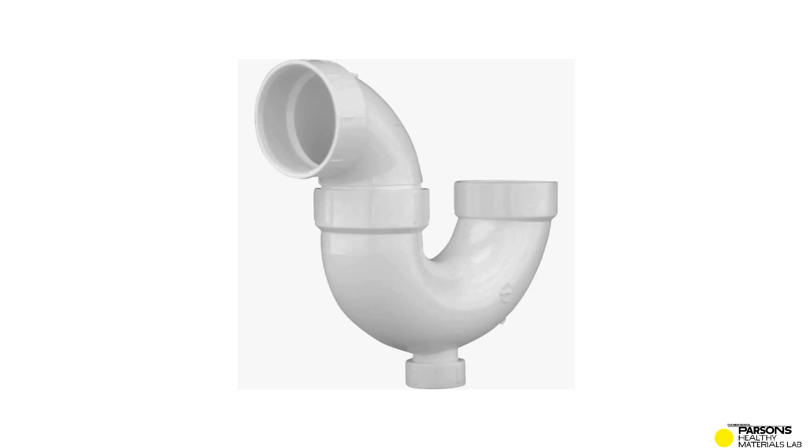As inquiry about matter around us evolved, we gained understanding of atomic structures of this matter, and people began to speculate on other molecular structures that are not found in nature, and began inventing new materials without understanding how they would degrade or impact environments and all living things. And now, synthetic materials are our ubiquitous building blocks of our homes and of our lives.

We're on a mission to accelerate the building of healthy, affordable homes, to eliminate toxic, climate-polluting chemicals and materials, and replace them with healthier, carbon-sequestering materials.

Because products typically used in construction contain materials that are linked to human disease. Their ingredients impact people in construction, production, as well as the people who live with those materials in their homes for long periods of time.

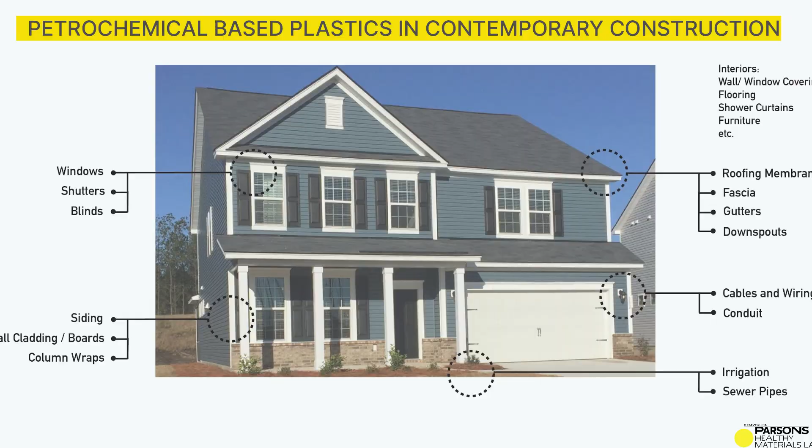And as you might know, contemporary affordable homes are primarily constructed of products that are made from petrochemicals. These fossil fuel-based products use a vast array of untested, often toxic chemicals that consume and emit carbon.

And the places where these products are made are polluting the water, air, earth that all living things rely upon to survive. So this is a systemic problem, and we look at it like that.

It's known that the materials in buildings, cities, objects, and furniture are releasing toxic particles that are absorbed into all of our bodies.

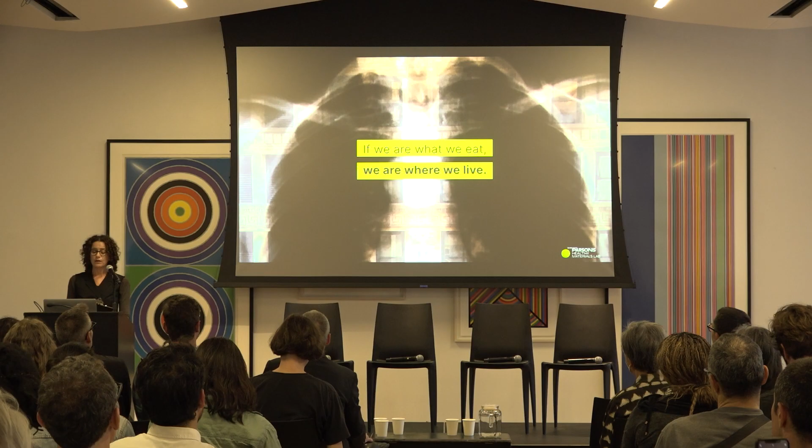We assume that the materials and products that we use in our daily life, not only in our buildings but in our consumer products too, have been tested for safety. Yet, most chemicals commonly used in the United States are not regulated for their impact on human health or the environment.

The Exposome Project provides evidence that 90% of human diseases are from the exposures over our lifetimes, and only 10% are as a result of our genetics. You get that? Only 10% are a result of the genetics.

This research is explained even in more depth by our partner at New York City's Mount Sinai Institute for Exposome Research, which reveals that thousands of industrial chemicals are now found in the blood of all of us. And these are the same chemicals that trigger many of the diseases that harm us today, from cancers to diabetes.

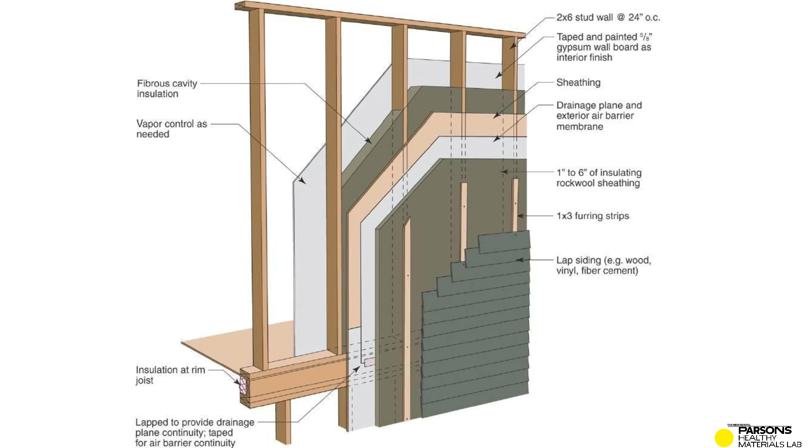Yet, a typical residential wall system in the US shows that many layers of building products often contain those same toxic chemicals. So you see how we're eager for healthier building systems to become the norm.

We're at an inflection point. We're living through kind of an exciting time for all kinds of reasons, as we all know. But we cannot continue to build in the same way that Western civilization has been developing.

At Healthy Materials Lab, we're asking, what is the pathway forward? How can we design and build healthy buildings today? We address the toxics and climate issue by charting new pathways to design and build healthy buildings.

We look at materials and ingredients through the lens of material health, asking how does it impact human health, carbon emissions, social equity? Does a product produce waste? Or is it biodegradable or regenerative? Does it pollute our water, soil, and ecosystems? We ask these questions of materials at every stage of their life cycle.

And we see that building homes is central to our ability to make this change. Through building healthy, affordable housing, we can build a demand for agriculturally based products, while also addressing toxics, carbon, equity, and loss of biodiversity issues.

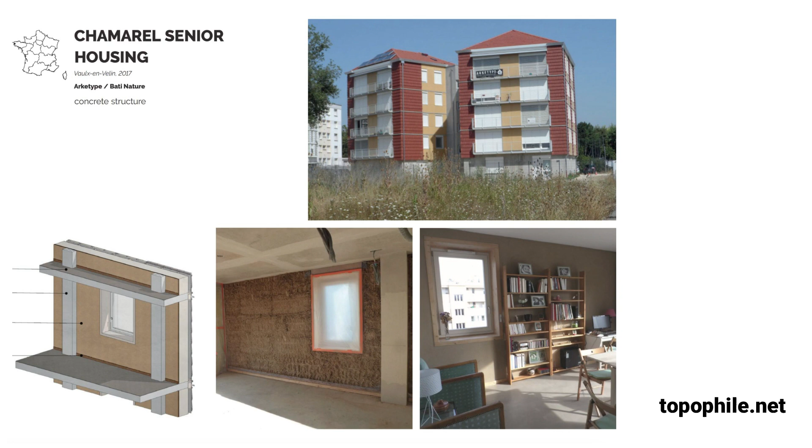It's encouraging to think that we can eliminate the use of toxic greenhouse gas producing building materials and instead build our cities with renewable plants. If you caught the program we hosted last December with Martin Pacot, founder of Topophile, you will have seen these examples of social housing and civic buildings in France, which are made of straw and other nature-based materials. This one is senior housing.

So tonight we're excited to connect the work of trailblazers working on exactly these issues, who have similar ideas to express this, and they're doing it. Each of their work is at the leading edge of creating a fully functional system from harvesting and farming grain to producing scalable building products to architecture with straw. Their knowledge is essential to make necessary change for the construction and architecture industry. So please help me welcome Ace, Jacob, Alex, and Paul.

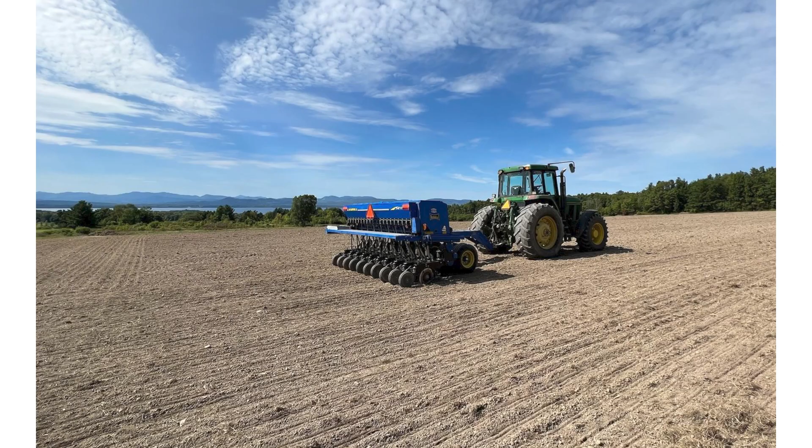It takes a lot more passes to prep the land in organic farming because we're not spraying, so we're not killing any of the plants. We're not using herbicide, we're not using pesticides, and so we'll have to work the land a lot more to get it ready because we're essentially trying to kill all the weed seeds by turning them back into the soil over and over.

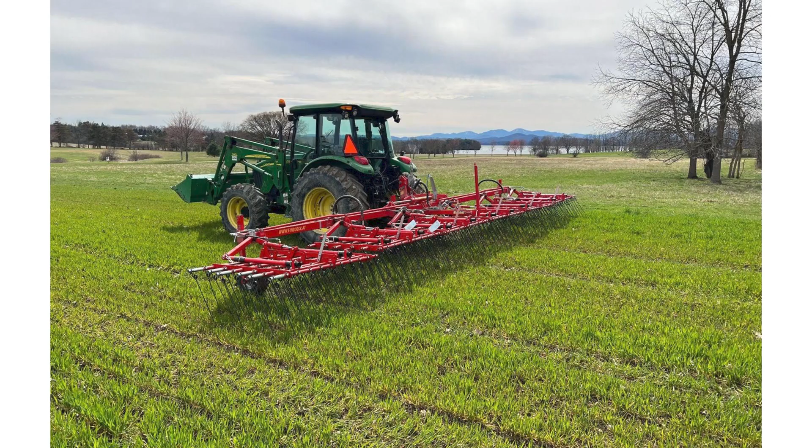This is a grain drill. This is how we plant the wheat. After we plant the wheat, it sprouts, and it usually grows to about this height that you can see here. It's like short grass.

Like I said, we don't use any herbicides, and so this is called a tine weeder, and we'll go back with that, and that's how we do weed control. We just drag that over the plant. It doesn't hurt the wheat plant, but it will kill the weeds underneath.

As the wheat matures, it grows luscious and green and tall. A lot of people don't think of a wheat field as being luscious and green, but it is, and it's really beautiful. Then in the beginning of July, usually, it'll start to turn gold, and the heads will lean over. Once the heads lean over, it's an indication to us that it's getting pretty close to being ready to harvest. So in organic farming, we wait till the plant dies on its own, and it dries down.

It has to be dry enough that the combine can harvest those wheat berries out of the heads without crushing them. So we have to wait until weather is on our side, until there's an opening in sunshine, but the plant is dry enough.

Whereas in conventional farming, they'll go in and spray the whole field, killing the plant in a matter of days, and they can harvest it. They can really time their harvest. I've handled some material, some bales that have come off of fields that have been sprayed, and they feel a lot different. There's a lot of residue on them.

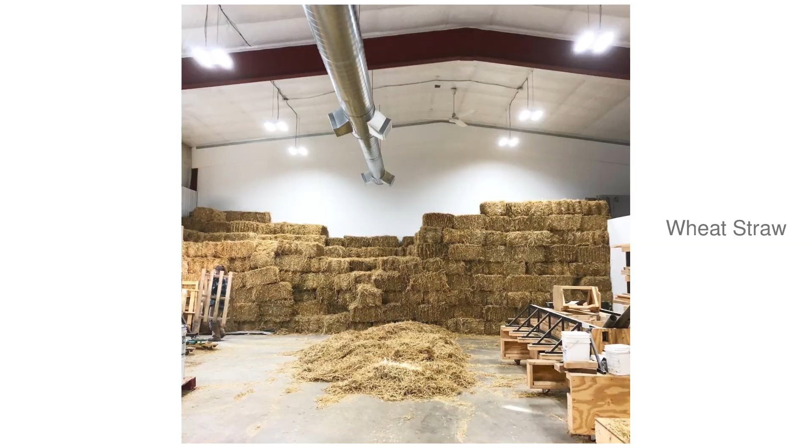We received those straw bales from Aurora Farm, from the Nitty Gritty Grain Company. David drives up in his truck, he backs up. This is our shop in Essex Junction, Vermont. And we toss the bales into the back of our shop and begin to build with them.

We thought we'd take a moment to introduce the other materials we use in our panels, because it's not just straw. We also use lumber for framework, and in our pre-designed modular buildings we use local Vermont lumber as well. The species are eastern hemlock, white pine, and spruce trees. The sawmills we work with are local sawmills sustainably managing woodlots, often for generations in the area.

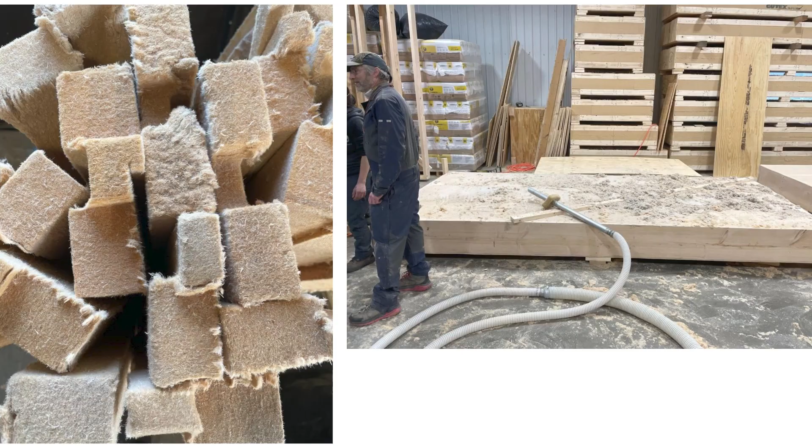Here's just a photo of what that wood fiber board material looks like. These are just pieces that we ripped, but I like it because you can really see the texture of the wood fiber. It's amazing to work with this material. On the right, that's an example of us spraying it, loose fill, into a cavity, utilizing our cellulose blower that we'd use to blow dense packed cellulose. So we utilize this material in a bunch of different ways to complement the straw for areas where we need other kinds of insulation.

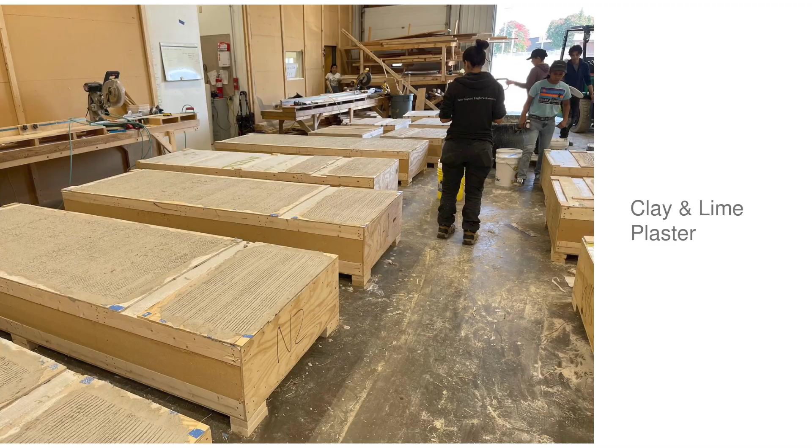This is a shot of our shop applying clay and lime plaster. In our high-performance natural building journey, we've really understood how we can use minerals in complement with plant-based materials. Clay is the friend of straw - that's maybe just the fun thing to say. Clay is amazing, I could talk about it for so long, but I don't have time.

But one of its wonderful properties is that it is very thirsty for water - it is hydrophilic. So when it sits next to a plant-based material like straw, what it will do in the long run is just keep that straw super dry over the long term. Also, because it is extremely vapor permeable, it allows that vapor, any water that gets into the assembly for whatever reason, to evaporate into the air. It does not hold it, it does not lock it in.

So one of the things that was a big challenge with buildings experiencing any forms of water failure in our climate was because they were plastered with cement and cement renders. So we've learned a lot about the use of these different pieces.

This shows us doing an awesome thing, which is getting to dump the plaster on from standing height rather than pick it up and put it onto a wall, which is what we always did when we were building these, not as prefabricated panels. So we're very happy about that.

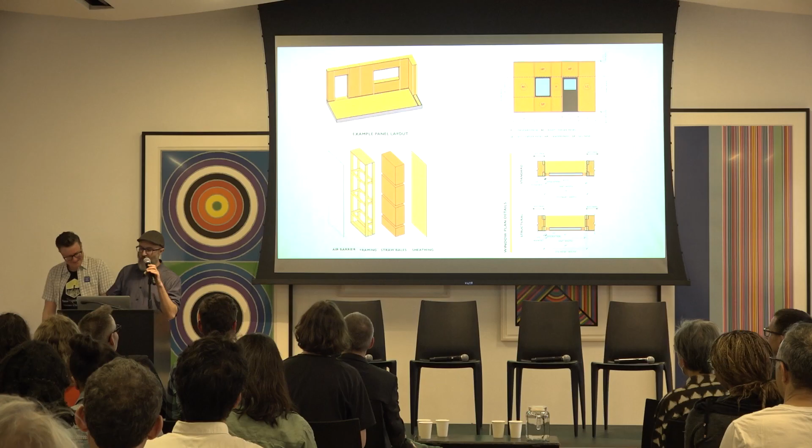New Frameworks is a worker-owned cooperative with several aspects to our company. In addition to manufacturing panels and doing site work in the field, we work on existing buildings, and we also have a full-service architectural team in-house. We do a lot of our own design work, shop drawings, and coordinate with architectural clients so the design process is as smooth and integrated as possible.

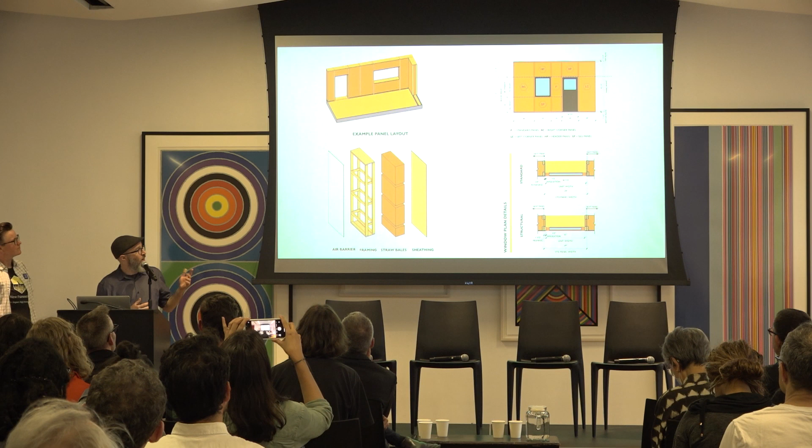A couple photos here to break things down, looking at the actual details of the panels. In concept, we're basically looking at double stud boxes stuffed with straw, with a plane of sheathing on the exterior and an air barrier on the interior. We're looking at examples of clay and lime plaster that we use for our favored air barrier, but you'll also see examples using vapor variable air, more typical conventional air barrier membranes as well.

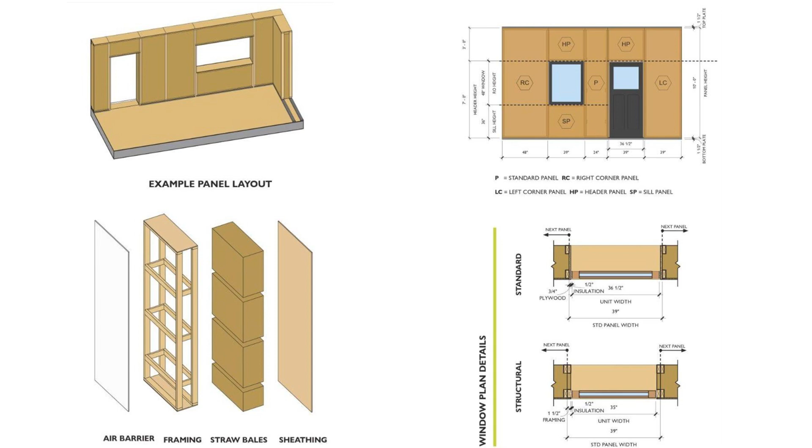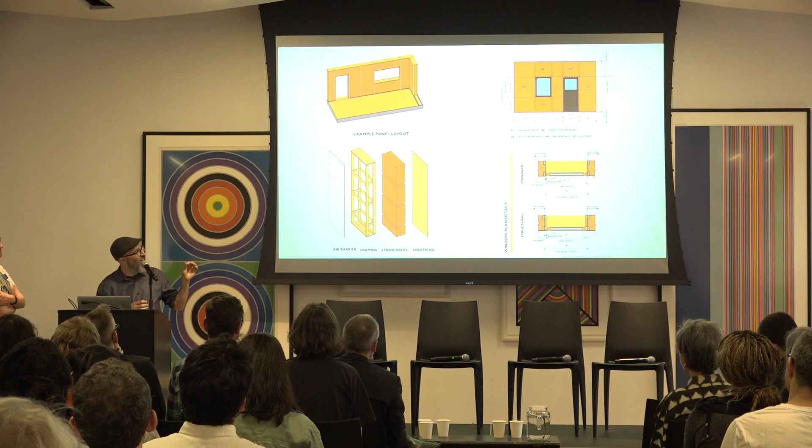The layout is kind of what you'd expect if you've worked in modular before, thinking of how to use panels to make a form. All window and door rough openings are built of the negative space around the panel headers, sill pieces, and the full height pieces on the sides. We're using the panels to formulate both the positive and negative spaces required to substantiate the entire shell of a building. You can get a sense on the right of some of the detailing, mapping out each panel individually.

When we bring this to the design process, we get very specific. We try to optimize designs to standardize or minimize the number of different panels required. If you've got 17 different size windows scattered in mosaics around the walls, that's significantly more expensive than bringing that form into greater simplicity. Part of bringing straw into buildings in a way that's streamlined and cost effective is incorporating the panelization process into the design workflow.

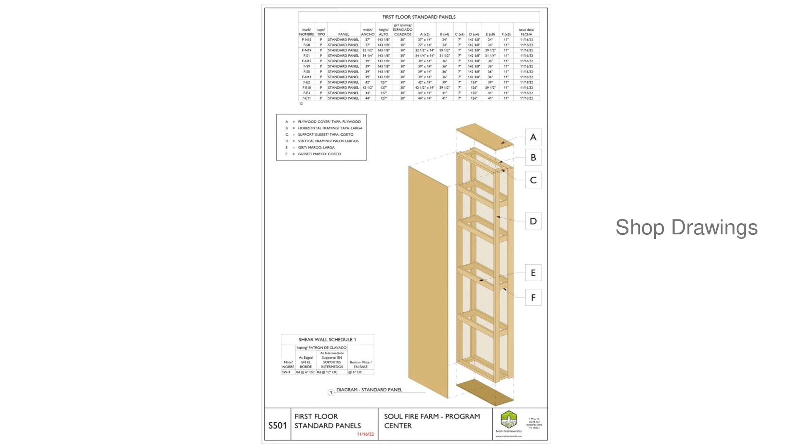As a design build cooperative, we bring that intention into the design process. It gets as detailed as every single panel getting a name, a code if you will, and is individually cared for in its transition from the shop all the way onto site, with the goal of minimizing the number of steps so you don't have to pick up or put anything down more than necessary.

This is a little shot of our shop, and this is the very simple tool we started with. One of our goals is to make this process as simple and replicable as possible, so our goal is not to have complicated, expensive CNC equipment required. This is something that can be replicated and done quickly, because we are in a climate emergency and we need people to replicate carbon storing, low carbon technology as soon as possible. Part of this is just a super simple design.

Our table that we build our panels on is essentially a plywood box on casters, so we can roll it around our shop, and our shop can be very flexible and movable. We have this framework created by a local metal worker in the city of Barre in Vermont. We drew up these plans for him and he bent it up for us. The framework keeps the panel square, and we build inside of it so it always creates the form for the panel, keeping everything square and tight. As we place the studs into the frame, we pack it with straw and go layer by layer until we get through the panel.

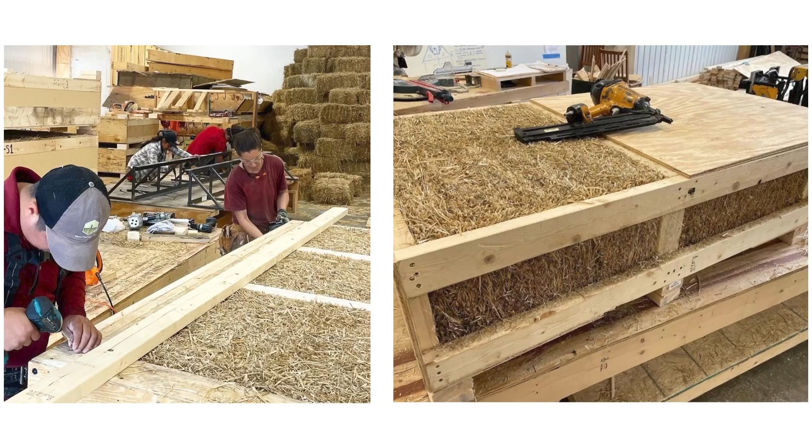We can build panels up to 12 feet in height at this time, and then we can make them any size shorter than that is necessary.

Some more photos from our shop. There's Marina and Jose in the foreground working on putting together and squaring and finishing up a panel that's already been built. We have a team in the background, Antonio and Avelia, working on building the panel in the frame. That's typically how we work.

We have stations, so we have the building happening and then the finishing and squaring in those processes and steps. And this gives you a sense of shipping and packing. I know we looked at this photo before, and in this context it's helpful to show how we stack the panels and get them ready for shipment.

We are very intentional about the way that we pack and ship our panels. We don't use plastic and a bunch of intense packaging to send them, but we make sure they're safe, and we can talk about how we keep them dry during shipment. We test our panels for moisture level when they leave our shop, and then when they're received on site, they take those measurements again, so we make sure everything is in a good zone in terms of moisture content for building.

We pack them in such a way that, if you remember the plan view drawing that Jacob showed with all of the panels around the building, we make our stacks so that when they're offloaded, they will make sense to the person who's installing it. They'll start with a corner and be able to undo the stacks all the way around.

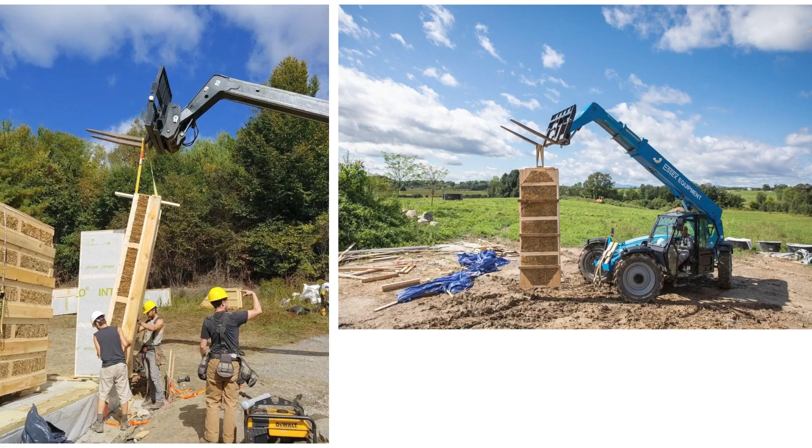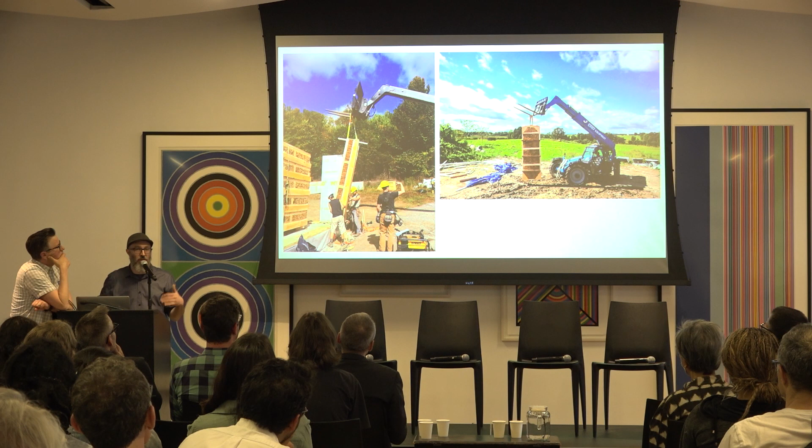So examples of what that looks like on site. We won't spend too much time so we can fit in a few more slides, but there they are going in. Again, they're designed intentionally to be relatively maneuverable on site and be able to integrate into smaller projects without the overhead and logistics of larger lifting equipment.

So that said, they can also serve for larger projects. I know the aspect looks a little funky, it's a fisheye view here. It's not actually a curved wall. But just to give some... you can't do that. You can do that if you're so inclined.

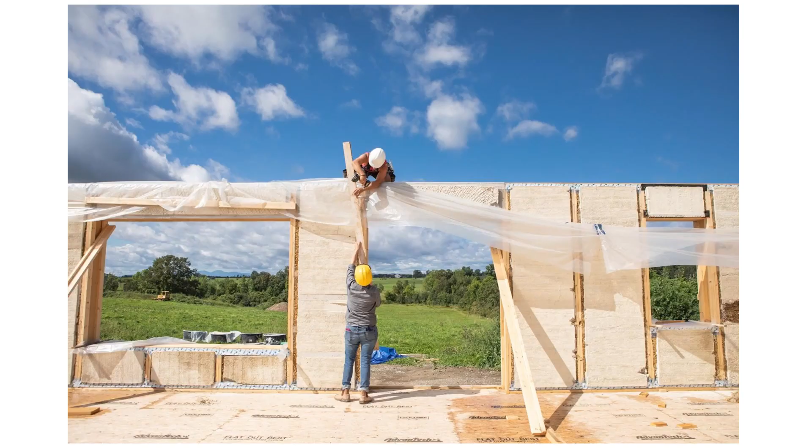Yeah, so this was a project that we did for some farmers in our area. What's fun about this is seeing the way that when we do plaster the interior, which we do both that and other approaches as well, you can see the seams that are in between each panel. It's very much like drywall - you have to mud and tape the seams when you put it together, and then we put a finish coat over the top of that. So that's just a fun thing to check out.

That's awesome when you have a shape that you're trying to fill that is also square. But when you don't, when you have something angled or something that's differently sized, it can get tricky to use straw. So we use a flexible form insulation.

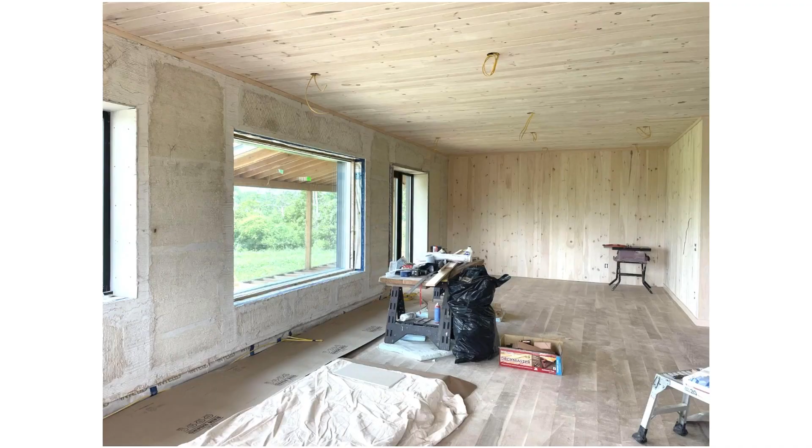This is showing dense packed cellulose, but like I said, we've now started to use wood fiber fill as our main fiber insulation. And then what I was saying about that earlier, one of taping the seams, you can see that's what that looks like. So this is a project with the seams taped and ready to receive that top coat of lime finished plaster.

Just to spin through a couple more details, a little more of a close-up of what that rough opening looks like. You'll notice these horizontal girts that are in the interior of the panel there. This panel is not being plastered.

It's going to receive an airtight vapor variable membrane and then an interior gypsum wallboard cladding. So those horizontal girts are used to keep the straw in compression during manufacturing, and then also become points of attachment for those additional materials, or if you have an interior service cavity. So we do have these.

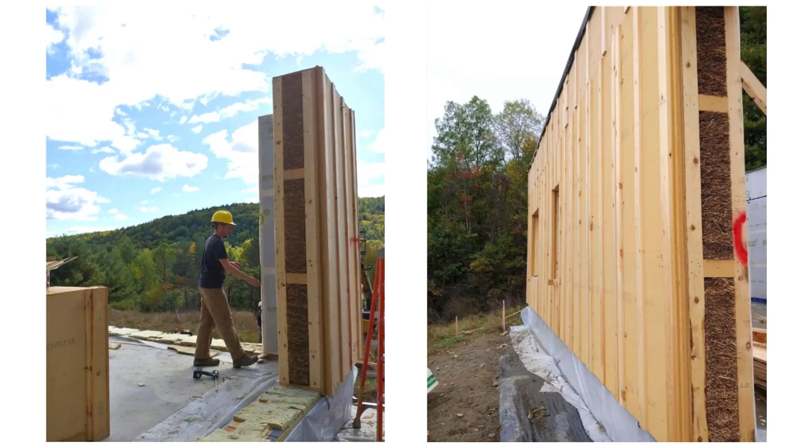A lot of people wonder how you fasten things onto the straw, and there are challenges to that. So there are some anchoring points built in during the process of the panel construction. This is from actually our very, very first panel project.

So some of the details are a little outdated, but kind of the talking points here, we've improved the form of the track at the bottom of the wall, but these panels are very exact in their construction, but most slabs and foundation systems you walk onto are not.

So we have a sort of a bottom plate, basically a double bottom plate, the first of which is installed directly on site to get to a level square form off of which the panels can sit without telescoping errors as you move your way up the height of the building.

And in this case, they're going for a higher level of insulation and decided to wrap the walls with full insulation wrap of that wood fiber board. So you can see it again in application here as an exterior wrap for an ultra high performance wall assembly.

Just looking at a couple more of these details around the plaster system, the air barrier system. So we have been innovating ways of getting airtight connections from plastered skins to wood products for going on 10, 15 years now. We've tried lots and lots of different things. You can do it in a very low tech and kind of inexpensive mechanism to get a long-term air seal between those dissimilar materials.

That said, it's awesome that they actually make tape for the purpose. So there are air sealing tapes that are fleece backed. They're designed to literally mud right into a plaster assembly.

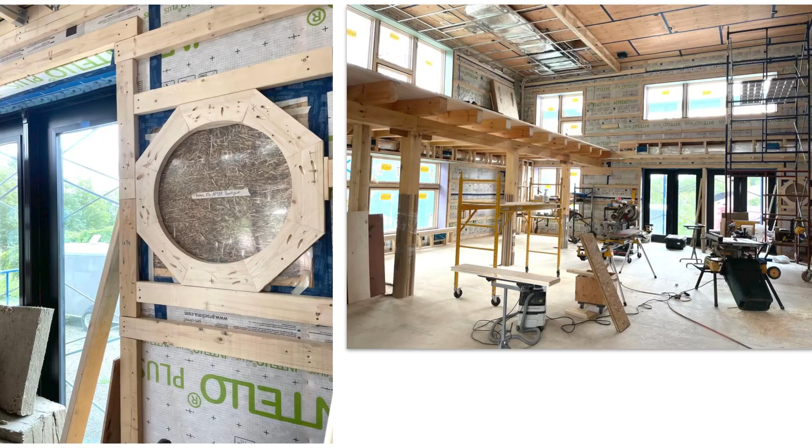That said, this would be an example of the same, but without a plaster assembly. So we've got a typical vapor variable airtight membrane on the interior, and here, this is that same commercial facility, so we've built out a service cavity to be able to facilitate running wiring, kind of separate the trades in the field so that electricians aren't needing to get into the walls. When you're running condensate lines from heat pumps, you don't have to worry about in-wall connections.

Can I just quickly say something about that last one? And then if folks want to see an example of what that looks like, I noticed that's how the Croft panel was sent. So that little square panel there that's sitting on the floor with the black, if you look to the interior, the part that's facing us right now is the exterior, but on the inside, they sent it with a service cavity to the interior. So you can get a feel for what that looks like.

And just some more elegant detailing on the plaster. We're a big fan of the system, and again, there's a thickness to plaster, so there's a little more design intention required to make sure everything lands the way you'd like it to. It need not be super expensive. When we apply plaster, it's relatively at cost parity with finished drywall systems, as long as those details are considered in advance. The Eurotrim approach of using the extension jamb to give a nice landing point to the plaster is an example of how to dial that in quickly and efficiently.

So this is an example of one of the buildings we've created through our Casitas program. We designed some small modular buildings using the straw panels as a base. To ask the question of how do we start with the field and move through to the form, we realized that though we could continue to be custom builders, it didn't make as much sense because we want to build on the straw panel basis and that modular element, and create designs with our own in-house team that really fit with that logic of form.

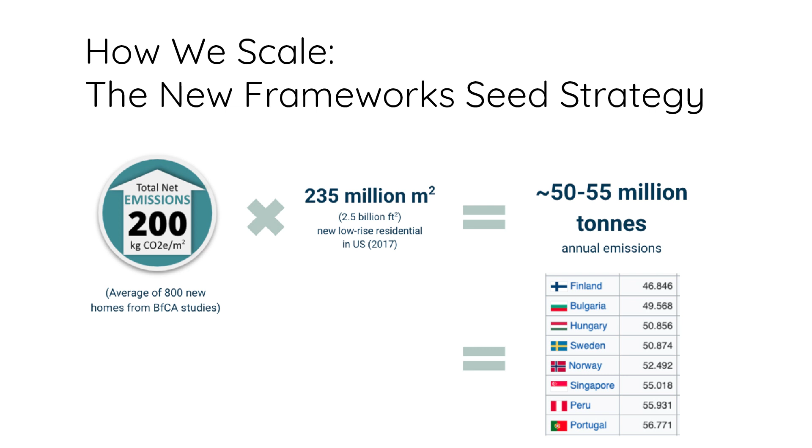All right, so just to wrap up on a few points on context here. We really strongly believe in the power of residential construction to make a really large impact. We use these panels in non-residential applications as well, but our roots are in residential construction. When you look at the average material carbon intensity of a North American residence, and multiply that out by the amount of square footage of low-rise residential construction built in 2017, the emissions from that material basis alone are larger than the entire emissions of Finland, Bulgaria, Hungary, Sweden, Norway. So this is the scale we get to intervene in when we're working down to a small scale.

We tend to think of industrialized materials and industrialized scale buildings as being the place to lean into, and we believe there's a horizontal replicability of improvement that can really move the needle at this scale when it's dispersed in such a wide format across our continent. So our approach to scale is not to become as large a company as possible. We find it's a lot more effective for us to port information than technology, so we're now working with cohorts of other companies interested in developing their own panel manufacturing processes, trying to build a network of panel manufacturers in various regions — one, so you won't have to ship to Idaho, and two, so that in every state we've got multiple panel producers working with materials from that state and providing housing solutions within that region. That's our approach for trying to address scale at this level while still holding onto the quality and culture of being a smaller organization.

And just to give a few other pieces, building a little bit of data bona fides behind that, one of my other hats is developing the BEAM tool, which is a material carbon emission tool.

If you want to talk about embodied carbon nerddom, come find me at the drink later.

Really excited to be able to put data to this, to both validate and optimize the carbon storage benefits of working with straw. We work with straw for a number of reasons, one of which is that it's the most effective way of storing atmospheric carbon that has been photosynthesized into materials into a building. There's no better material we've found to do that. So in the Terra, the building that Ace just showed, almost 6 metric tons of carbon are stored in those bale walls in that 900 square foot building, which yields a building storing 3 tons of carbon in all of its primary materials.

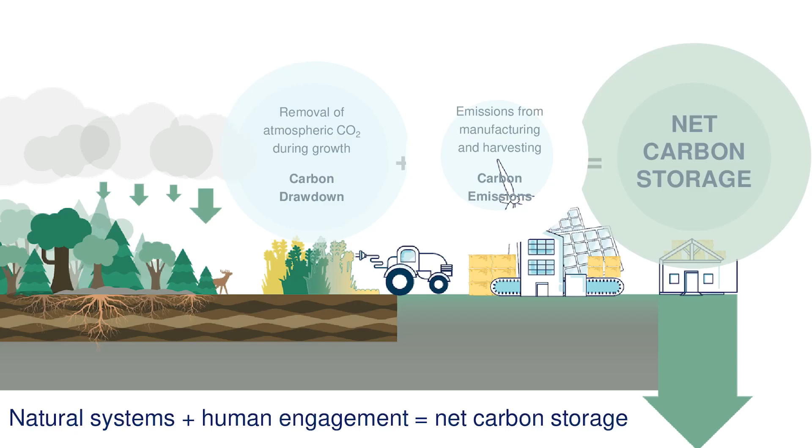So for us, whereas our current approach to architecture is to design a building, look for the materials, and extract them to provide the building, and green building tries to extract less harmfully, our approach working with straw is to look at the resource flows coming out of sustainably managed forests and agricultural systems. How can we take those resource flows, turn them into products, and design architecture around that product basis, which puts us into a much more humble and collaborative relationship with the ecosystems we rely on to sustain the built environment. So by shifting that model around, field to form, not what can we extract for the form we want, but how can we manifest beauty and form out of the resources available to us. That's the logic behind why we're continuing to work with this material.

And that logic extends far beyond just a technocratic solution. We could just be happy working with straw, but how we're working, and the actual process of the work, matters too. There's an internal and external part to that. For us, being a cooperative has a really important social value, being able to provide not just jobs and careers, but actual pathways to ownership for all of our team members, many of whom would be disenfranchised from company ownership in most other sectors of our economy. The value of our company's existence has been built off weathering the transition to being a manufacturer, weathering the disruption of COVID, weathering the recession. We relied on a cooperative structure to help pull us through those difficult times. It's literally a form of resilience for us in being able to continue this innovative work.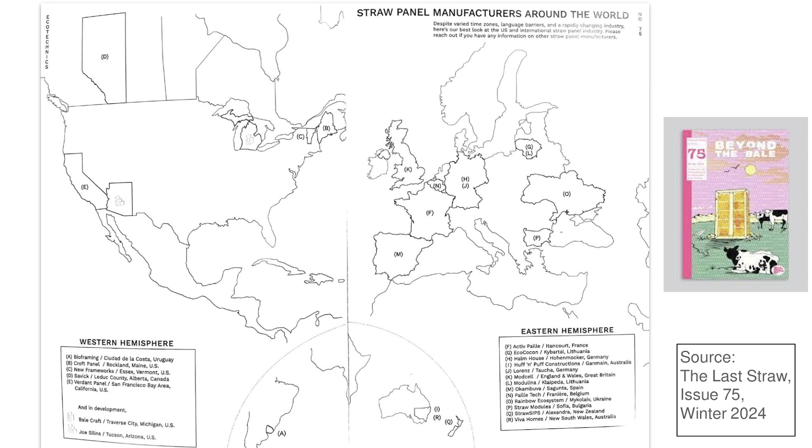So then the last straw, we've got a couple of issues over there folks are welcome to flip through. This is amazing, a periodical that serves the straw bale building community, which recently put out a whole issue on panelization and straw. The fact that we can see straw bale panel producers all over the globe, and see where they are, is incredible. This is a really amazing new moment we're in, a rising tide of people asking how to build with biogenic and plant-based materials.

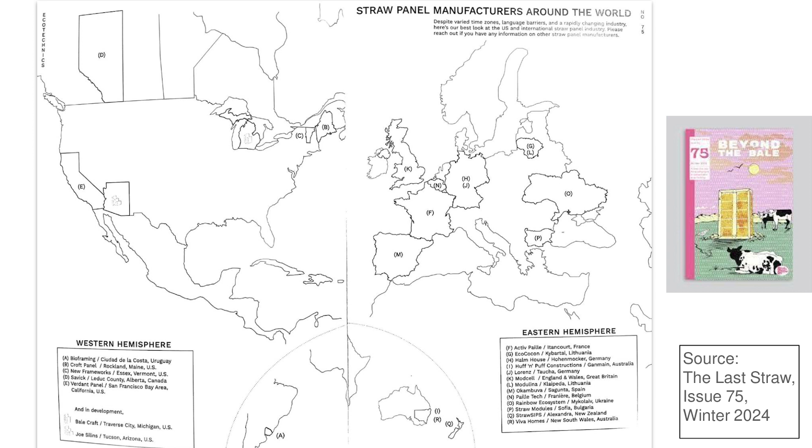And I believe we have Peter from EcoCocon here, Peter Jensen. Yay, hi Peter. EcoCocon brought a panel as well, and Croft, who's based in Maine, and we're based in Vermont. And then we have Greg Bossy here from Rare Forms, based in Massachusetts, part of our SEED program, one of our cohort participants this year. Just seeing this grow, I want to look at this and be here with all of you in 5 years, and this is just a colorful dot of beauty. That's what I want to see.

Back in the fall, on November 15th, we partnered with Mass Design and Halff Climate Design to gather folks from across the Northeast to answer the question: how can we scale plant-based and bio-based materials rapidly to meet the challenges we all know we're facing? We felt it was most effective to do that cross-sectorally, bringing in folks from outside the AEC industry—architecture, engineering, construction—and also policy folks, government folks, and academia, because we need creative ideas and need to answer these questions in a broader way.

So if anyone's interested in learning about this collective, we are bringing everyone in that we can and working with a bunch of working groups to solve questions and really move this forward. I want to give a shout out to Jonsara Ruth and the Healthy Materials Lab for being part of that initiative—they were in the original summit. So yeah, this is truly collaborative.

All right, last slide here. So where we're moving with this is positioning this work within a larger movement beyond just a technology stack. We started this work as little individuals, riding on the shoulders of other small individuals trying to figure this out over the course of the last 20, 30, 40 years in modern context. Most of them didn't make it and couldn't make a business model from it, as it's quite difficult.

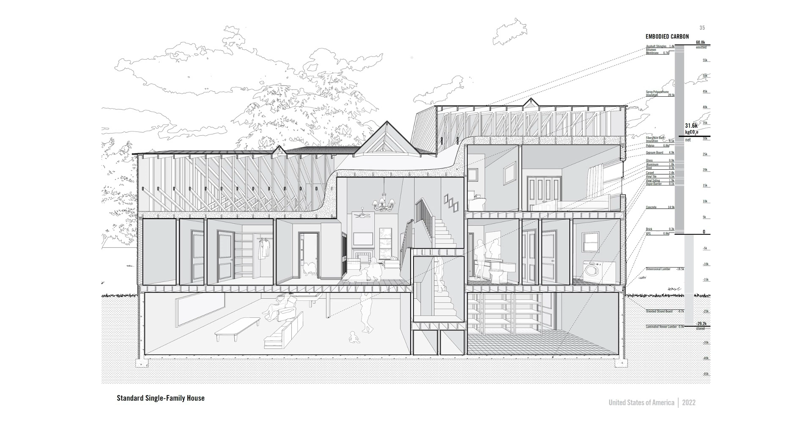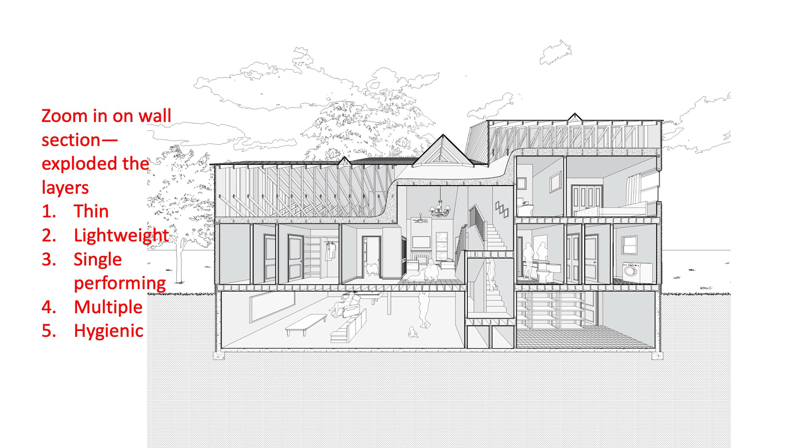Great to be here. So I'm going to dive right in and pick up on what was already said. Not only are we dealing with the problem of toxicity, carbon emissions, and reliance on petrochemicals, but we've also gotten into a position where we're building a lot more than we need, particularly for houses. Houses have scaled up dramatically from 1950 to 2020, and a lot of this is a product of the fact that architects became obsessed with the exterior finish and the interior—not so concerned about what's inside. I'll blame ourselves in our past formation for being in that camp.

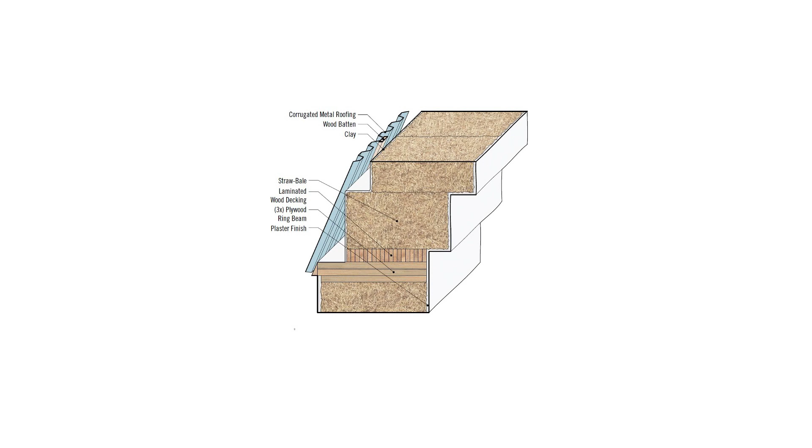But in a sense, we don't look as closely as we need to at all of these multiple layers that exist, and the fact that we've inherited this system involving incredible quantities of lightweight, thin, single-performing, sterile layers that largely produce a strict binary between interior and exterior. There are other ways to go about it, and I think this is architecturally super interesting to wrap your head around—what are the ways in which we might look at single materials or monomaterials, thickness, ways to engage a totally different relationship to the built assembly.

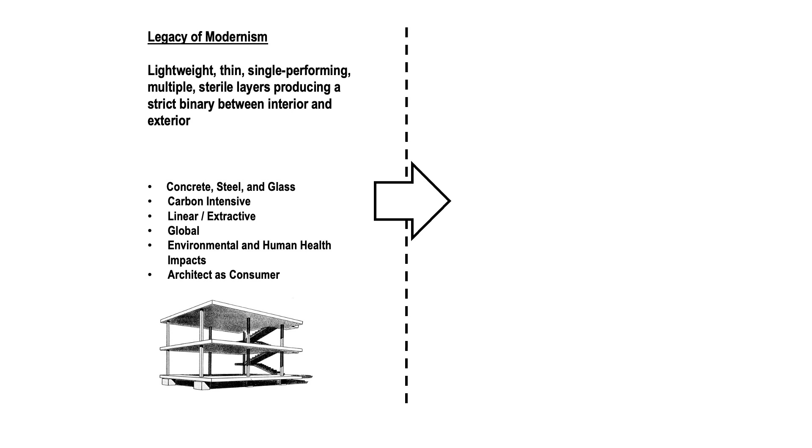So these are samples of some of the projects that we looked at in our book. Largely they support an argument that says we've inherited this legacy of modernism based on materials that position architecture essentially as a kind of consumer, and we really need to move to a model where heavy, thick, regenerative materials position architects and designers to be more engaged in the material cycles. This is really a paradigmatic shift—it's not just simply a shift of substitution.

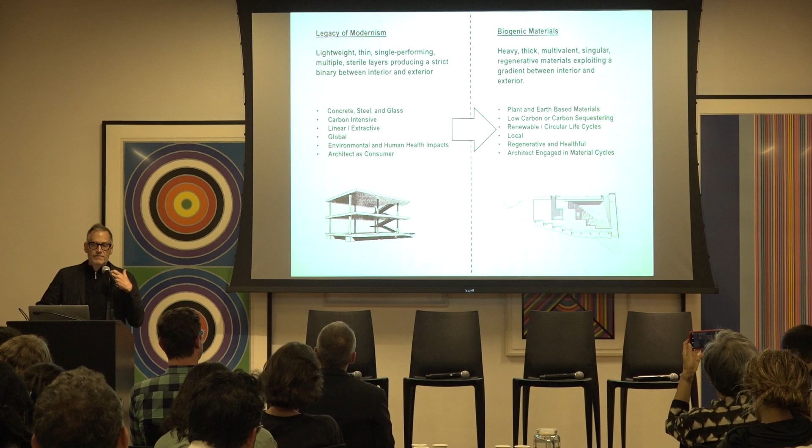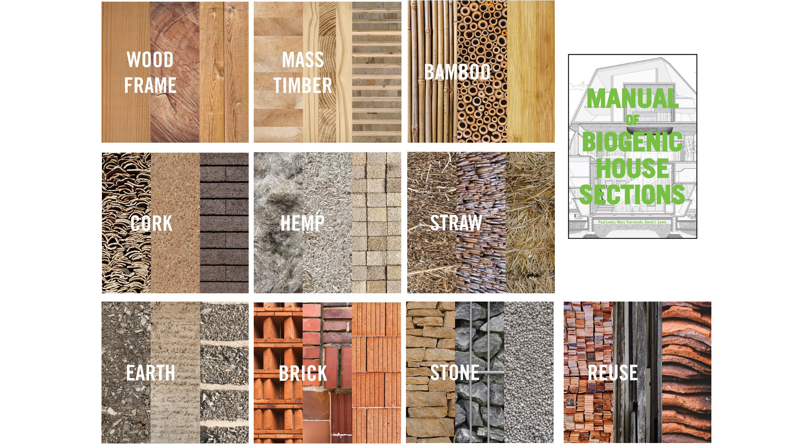So that was the basis of the 55 houses that we looked at in this book. It was organized according to different chapters of dominant materials. And it's interesting to note that of the plant-based or biogenic materials, really only hemp and straw grow quickly. So CLT and mass timber is not going to save us. It's certainly better than steel and concrete, but we have to look at other models.

Straw is extraordinarily important in this context. It doesn't displace agricultural crops, as has been mentioned. It's essentially a kind of residue of a food system that's already in place. It is everywhere, it's ubiquitous.

There's an anecdote, and I'm not even sure if it's true, but it's a great anecdote, which is that the amount of carbon sequestered in straw worldwide is equal to the amount of carbon emissions of concrete. I don't know if it's true, but it's great. And even if it's partially true, it's at a scale that's really significant, and that's what we need to capitalize on.

The issue is, how do we store this in the buildings? And more importantly, are there ways that this would transform how we even think about the design? What are the ways in which buildings might need to be able to capitalize on this? What's the architectural invention that could come from this?

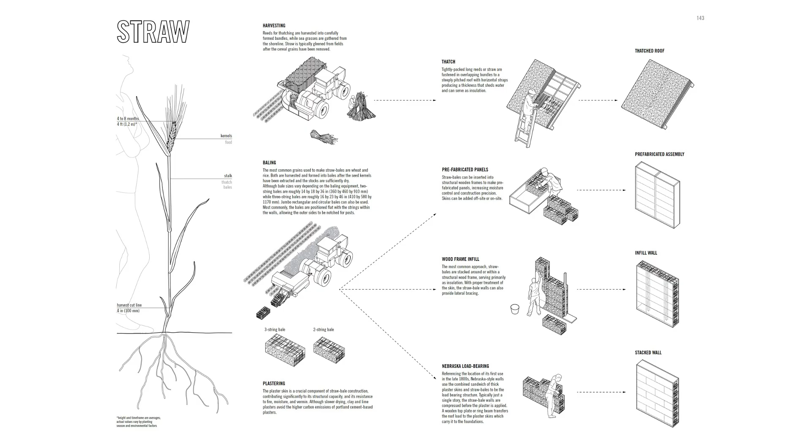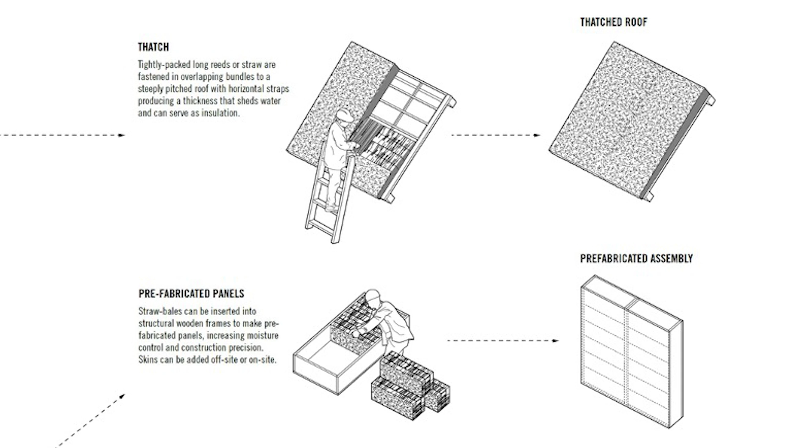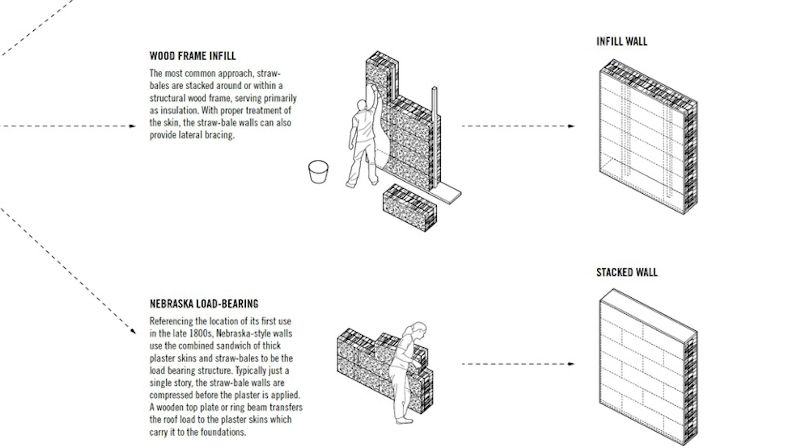So we've looked at, just moving quickly, when you translate straw into building form, there are certain known models. The prefabricated panel we've heard about. There's also the ability to place it in an existing wood frame, again not letting it be the structure. But there's also, in fact, one of the origins of the use of straw is as a load-bearing insulation, the so-called Nebraska load-bearing frame.

This dates back to the late 1800s, when balers were first being made available, and there was a lack of access to other building materials. And there's some buildings that still exist, 100 years old.

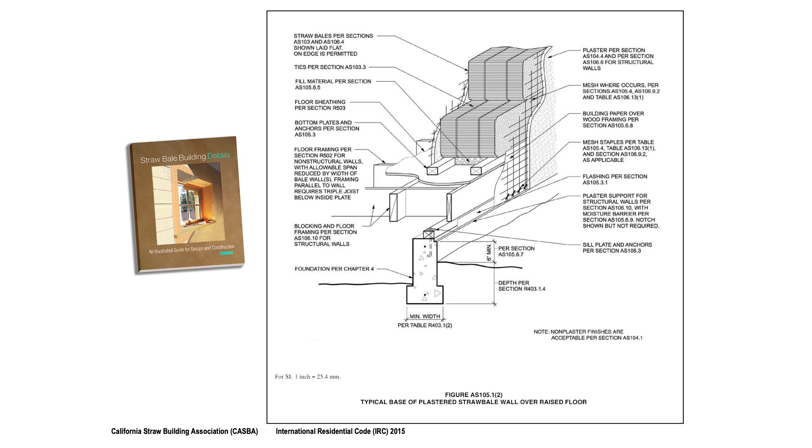And it should be said that not only does straw have a kind of long lifespan, a long history, but it's also recently been codified in IRC and code. California Straw Building Association and others need to be heartily thanked. I highly recommend this book. But one of the interesting things that comes out of this is to try to think, what are the impacts on how we might go about working with this material?

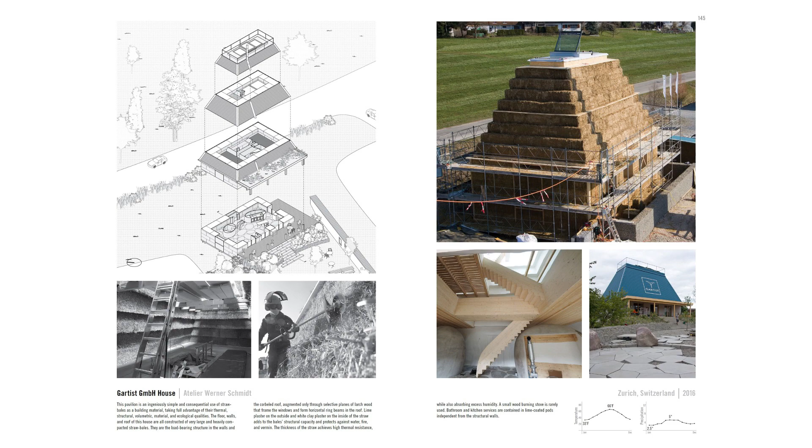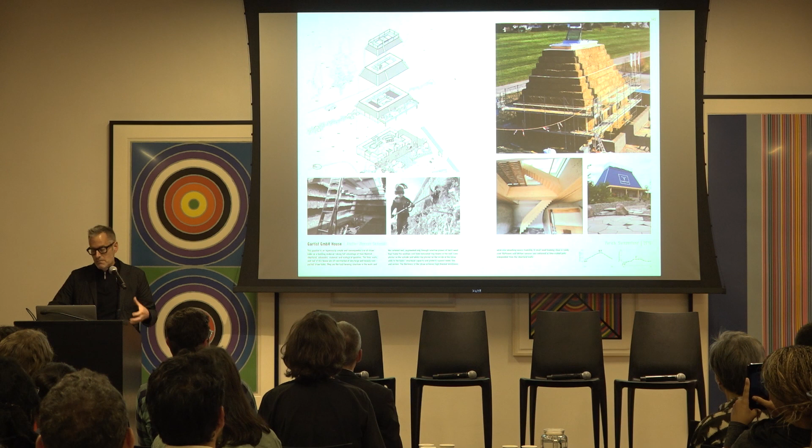And so we become very interested in the load-bearing insulative capacity of, say, jumbo straw. This is a project by Atelier Schmidt, uses 30-inch by 50-inch by 100-inch, 650-pound jumbo bales that are then tied together with ring beams of CLT, but it's essentially load-bearing, and produces this super thick insulation structural blanket that contains about 84,000 kilograms of CO2. It's a kind of fascinating change to what we expect architecturally.

This led to, and I should say, the research on the manual led to us wanting to design 5 biogenic houses, which we did. After 4 years of looking at other people's work, you kind of want to design your own, so we did. 2 of the ones I'll present today are based on straw. And we worked with an amazing team of people, but I have to mention Kyle Reich and Celia Chesabel, who were instrumental in both of these two books.

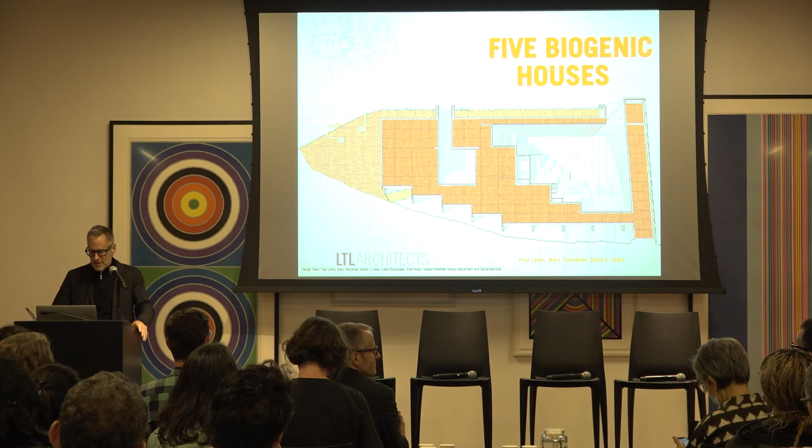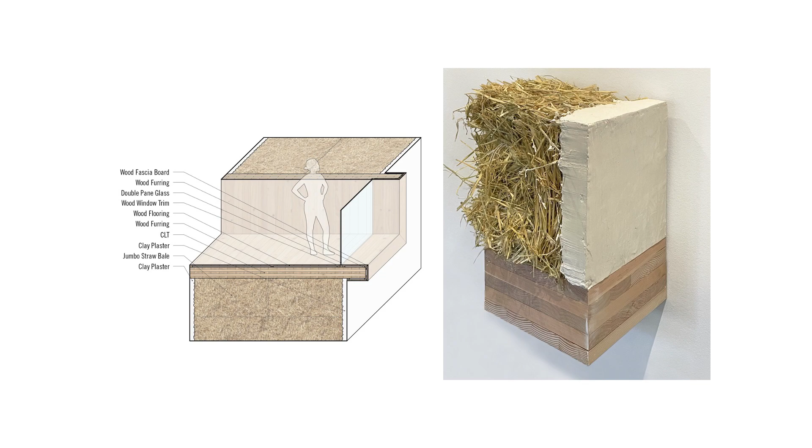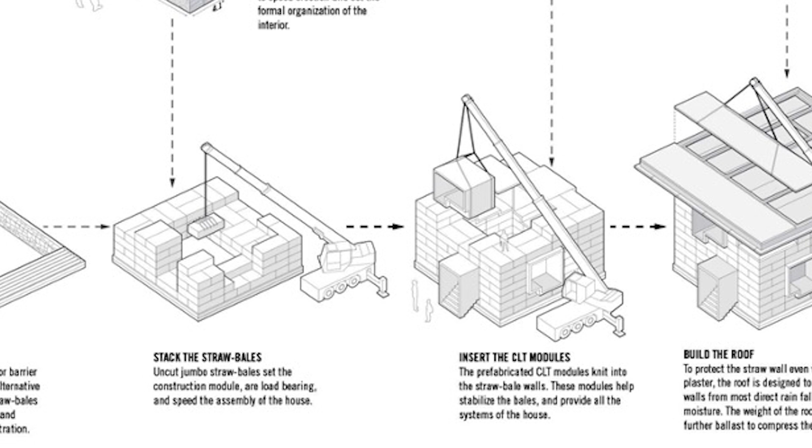So the straw bale spiral house is essentially, it's a very small scale, but it combines CLT with a very thick donut, if you will, of straw. It's basically trying to make a series of prefabricated CLT boxes that then get placed into a thickness of straw. Essentially, the house has a kind of wall of double stack of jumbo bales around it. Space is removed in which is then positioned the 4-sided CLT prefabricated panels that constitute the room. So in a sense, you get a room that fills the thickness of the walls. We have a large overhang roof to protect the plaster, and then also a kind of skylight to bring light down into the middle of the donut.

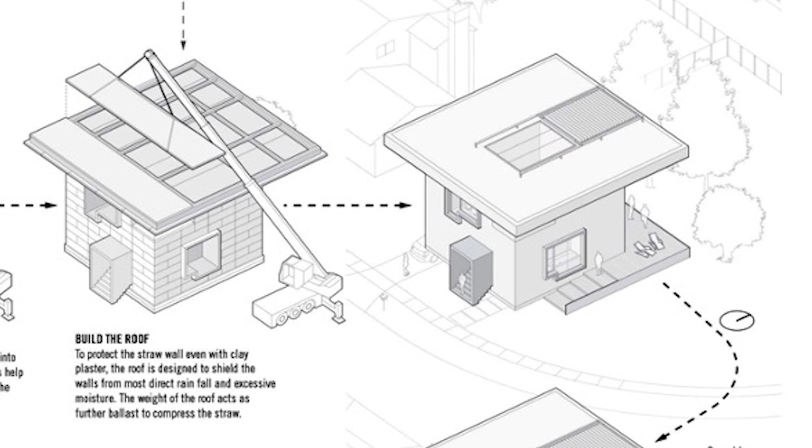But effectively, the rooms spiral around this space. So in a sense, the wall and the rooms are identical, they're synonymous with each other. So you get this super thick building, but also very porous, very open. The space that's produced from it, we think is unprecedented in some respects because it's reliant upon this excess of thickness that's made possible through straw.

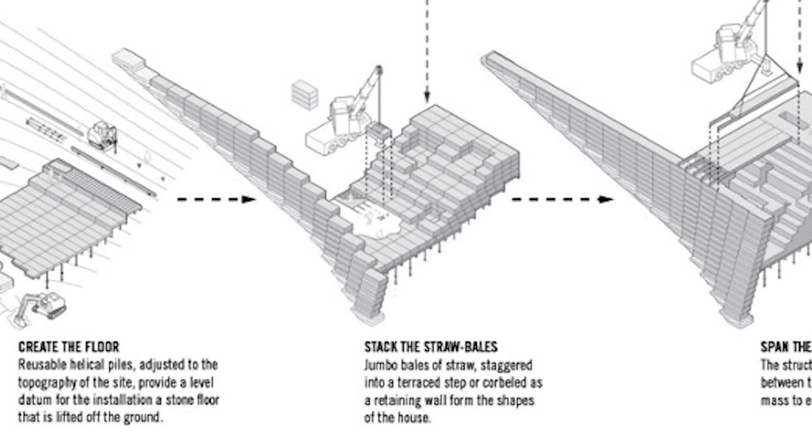Mass Straw House does something similar, looks at the ability to design a project that is more mass than it is space. And here this was done with 2 different systems of straw bales. One is a stacked wall. They would run perpendicular to the contours.

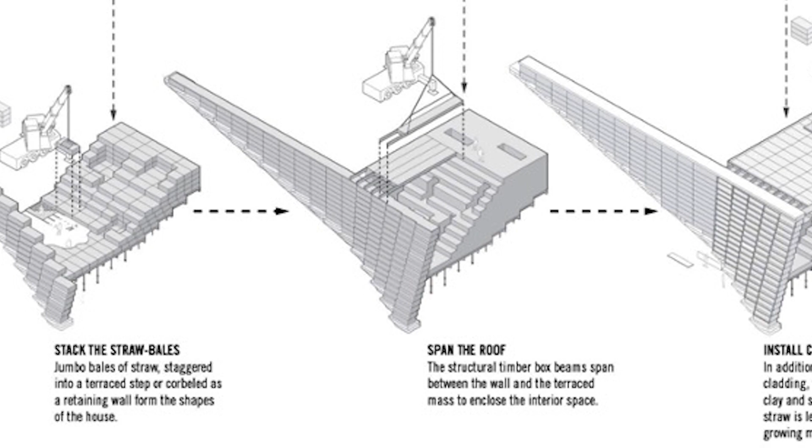They would slowly curve away, and adjacent to that would be a plinth, a zone of thickness, of straw bales stacked up and then carved to produce space. The space between them is the main living and dining area, and these two straw assemblies are tied together with a series of wood box beams infilled with straw. A membrane is placed on top, and then another layer of straw is left on top of that, essentially as a way to sponsor a green roof.

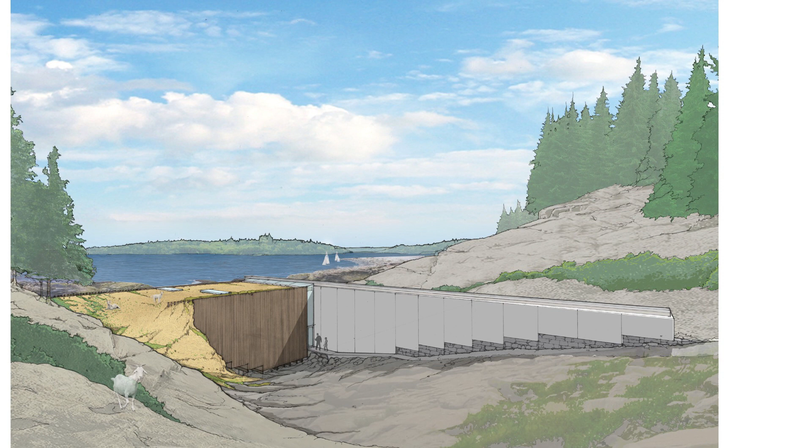And as a nod to the 3 Little Pigs' anxiety about straw, we said, all right, let's let it just decompose, be part of the flora and fauna of the site.

Spatially, the project is really this interstice between these two straw systems, but also the private rooms nested within the thickness. So you get the living area, the stacked gathering places, and then into this thickness are the access to the two bedrooms and the bathroom, each with their own skylight. They're amazingly acoustically autonomous from the rest of the house, which if you live in a New York City apartment, you really want to have.

So this was a way of imagining a very different approach to the efficiency that's so dominant in the way we think about materials. What happens if there's a way we could start using a kind of level of excess to produce a very different model of a building?

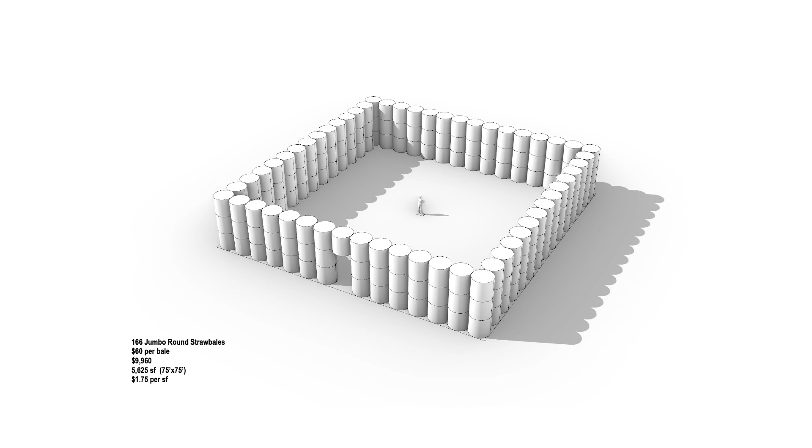We've been really interested in figuring out what are the other consequences of working with jumbo bales, and in particular looking at the kind of round jumbo bale, and how this might again be a different catalyst for architectural invention. They're relatively cheap, and if you stack them three high around a space that's about 75 by 75, it's about $1.75 a square foot. Obviously there's no skin and roof, but that's still pretty cheap, right?

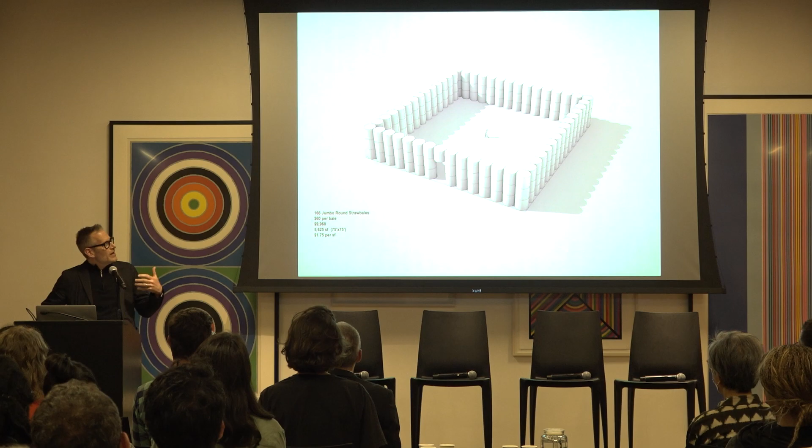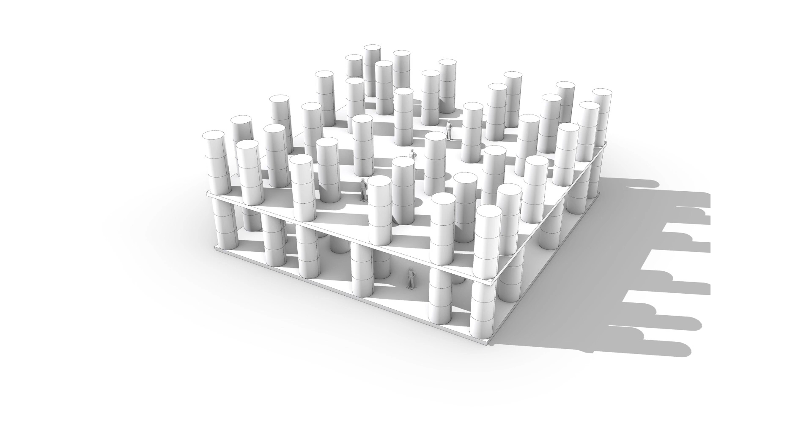So it lends itself to an interesting possibility: one could make the entire site a thickness of straw. You could start carving, design through other models, remove things, develop rooms and corridors in fundamentally different configurations. You could have columns that become walls, columns that cluster to form different aggregations, very different spatial organizations, and then with a slab of CLT as a floor, one could stack these up to produce a building model whose tectonics are really just not what we're used to. It becomes something akin to a hypostyle hall, but ultimately built out of straw.

Now if one looks at this in more detail, the ability to clad it with membranes, a rain screen on the outside, wood slats on the inside, we started thinking this is actually pretty interesting as a tectonic. What happens if we went back to one of our past projects and reimagined it? If it had to go through the filter of straw, or jumbo round straw bales, what would happen?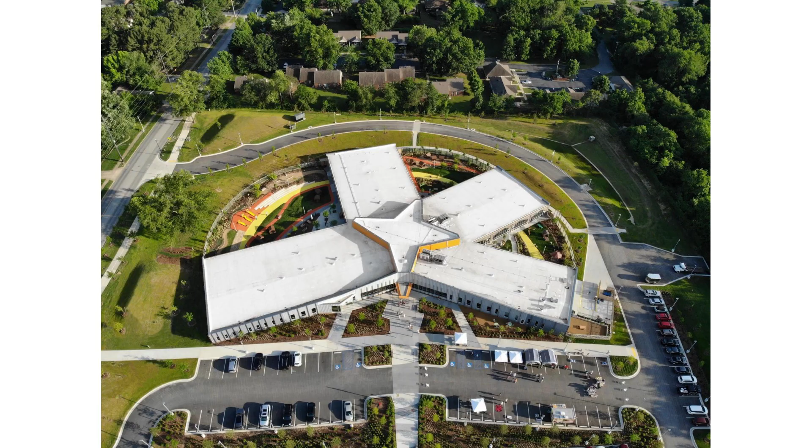So this was a project we built a couple of years ago in Arkansas. It's an early childhood education project, about 240 children, very young age up to age 5, so the relationship between the classrooms and the play spaces outside was crucial. This was done in collaboration with the Parsons Healthy Materials Lab, and it used no plastics. It was as good as we could get. We developed these interstitial spaces where kids could play, these large porches, but it was dependent upon working with conventional materials, studs, drywall, etc. We didn't use latex paint, we used mineral-based paint, and we did what we could spatially.

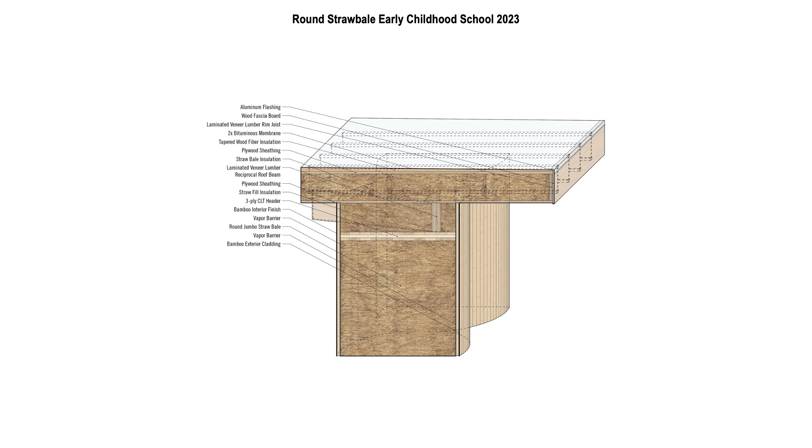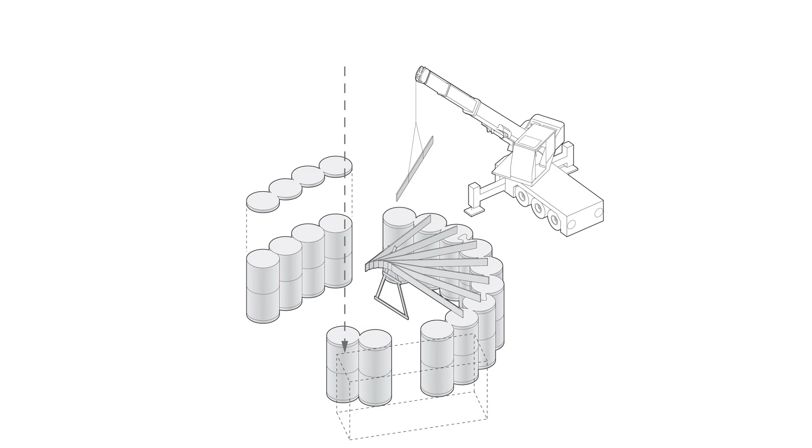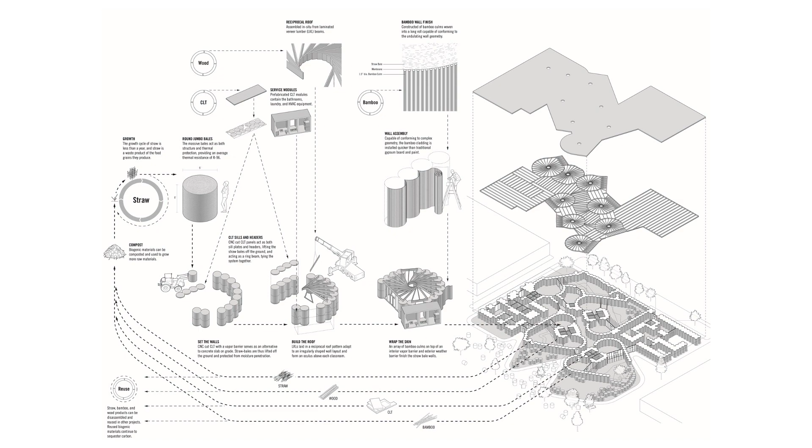But I think it would be so much more interesting if we had run it through with the capacity of thinking about straw. In part, we could imagine each of these rooms being basically an array of straw bales that would each support a beam, forming a reciprocal structure leading to a skylight in the middle of the rooms. These rooms would have thick walls that kids could climb in and inhabit, and then those walls could extend to the outside, with the bales themselves framing the exterior space, absolutely synthetic with the play spaces. Kids could play on the walls, in the walls, around the walls. Each of these rooms would be adjoined through a bathroom, and then they would form a kind of heart-shaped collective with two classes of similar age children feeding to an exterior play space. So we liked the fact that it happened to produce a heart that was non-intentional.

We did not diagram the heart, but it worked out. It's the consequences of working with straw—you end up with heart-shaped plans. Is that true? So anyway...

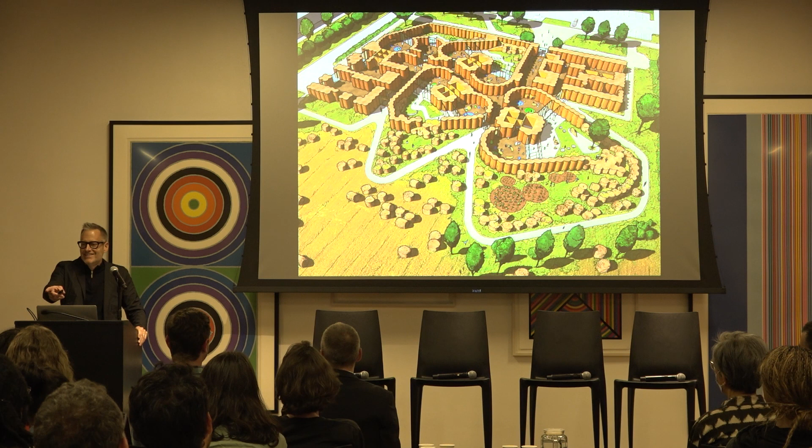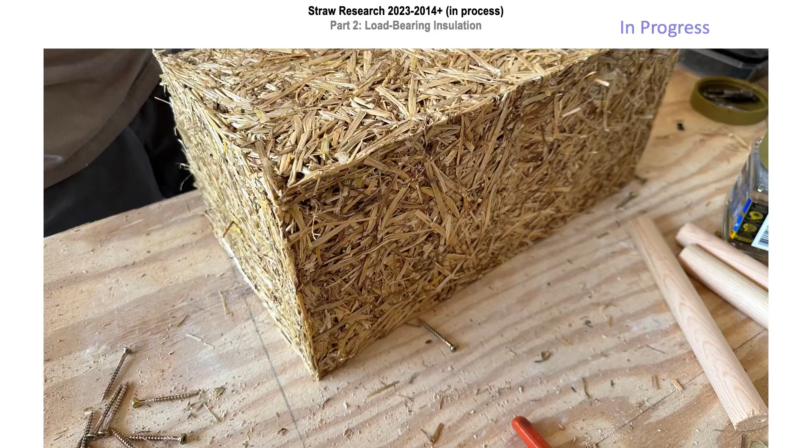Okay, so the last thing I want to go over is that we became very interested in the possibility of making a load-bearing insulation that would hold, in a sense, through binders and not be reliant on the stud frame. So we said, let's try to develop a system that would allow us to compress straw with a range of different binders, really to test the material.

We weren't making blocks per se, we were trying to test material by aggregating them into a form with the assumption that we could start forming or molding panels that would be much bigger. So even though what you see us making are blocks, the goal is not necessarily a block, but a larger scale system. And the key was the binder.

Because if you're compressing, the beauty is you get the compression allowing the straw to work structurally. It significantly improves the fire performance—it chars, it doesn't burn, like mass timber in some respects. But we still retain the insulative value within the cells of the straw. So we're able to get this holy grail of structural insulation.

So rather than showing you slides, I think I just have a video going through this. This is looking at how we went through a range of different binders, from glues to earth to limes to mycelium, which didn't work at all because it couldn't penetrate into the depth. We developed a compression machine.

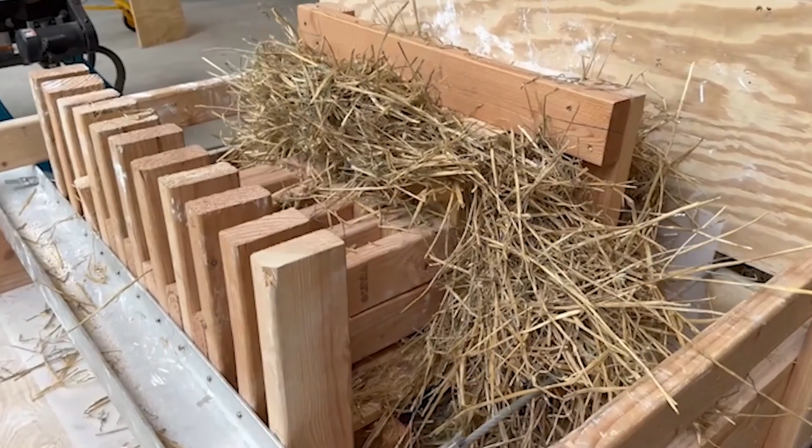Croft was instrumental in advising us on the compression machine, using two truck winches to get about 28,000 pounds of force, and basically compress straw with different binders into molds so we could hold the tension while the binder was drying. It worked out very well, but certainly the drying time was a bit of an issue. Here you see the mycelium, looking at the unboxing of the different components.

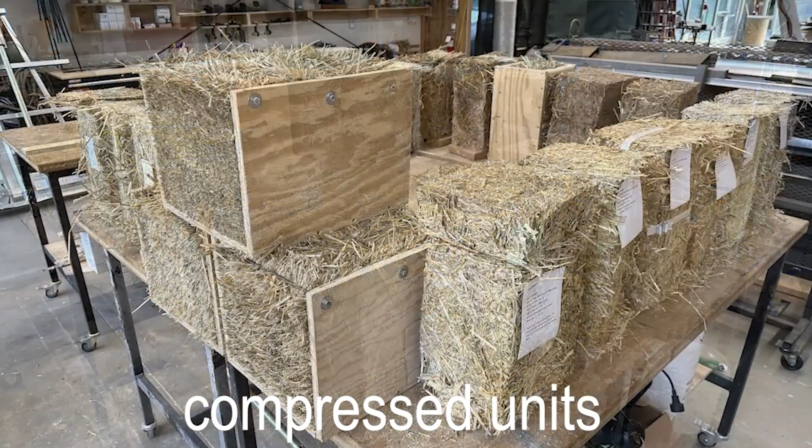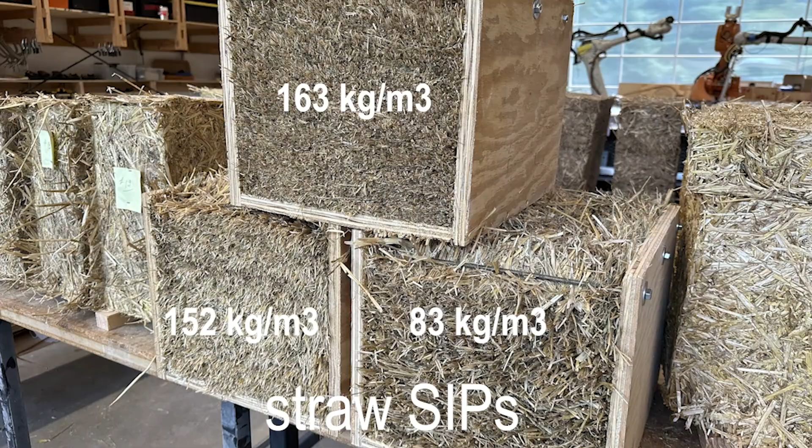So we went through about 20 different materials, including a series of straw SIPs, basically OSB, and of course the chainsaw comes out because it makes for great videos. But you end up with this ability to look at really dense material, 163 kilograms per meter cubed. We would then take the units and had to cut them into smaller chunks, unfortunately, to be able to test them on the Instron.

It's a really interesting performance. There's no horizontal deformation. It takes on increasing load—it doesn't fail. So you get this ability to take on more and more load as it deforms.

The thermal tests were also super positive—actually, they were too good. They were getting an R3, R4, which is way too good, so we know that the test is flawed. But it's interesting. Trying to get an R value reading off straw is really difficult.

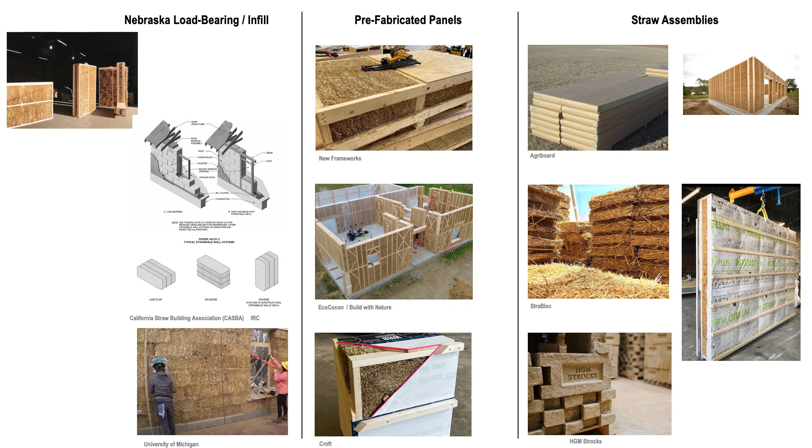But nonetheless, we're super excited by the possibility of imagining a different way to work. There are a number of people working in this arena, and what's fascinating is to see where this is going to go. It has a long history, but its innovation needs to continue to accelerate. More importantly, from an architect standpoint, thinking about ways you can change the basic premise of how buildings are designed—there are great opportunities that are possible.

We're extremely excited by straw because it's the material that can scale to sequester carbon in a way unlike any other material. So thank you very much for being here.